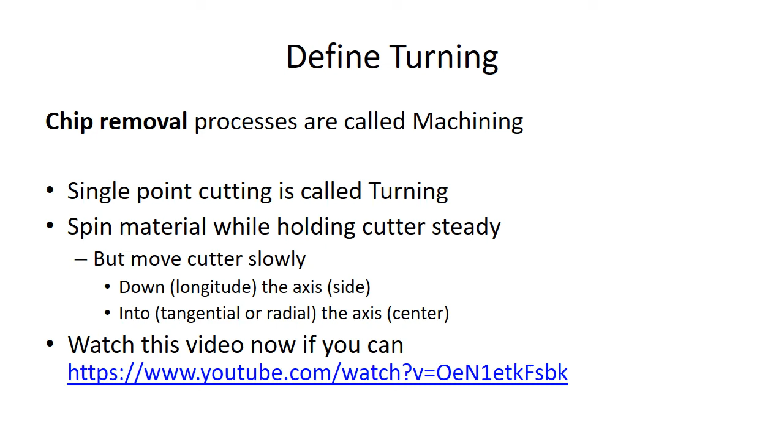We're going to learn about facing and regular turning. Now, the machine that does all this is called a lathe, and there's engine, turret, and wood lathes. The most common lathe, particularly for manual machining, is the engine lathe. The turret lathe will usually be more of a CNC machine, which we'll get into in a whole nother unit.

And I will talk just briefly about wood lathes.

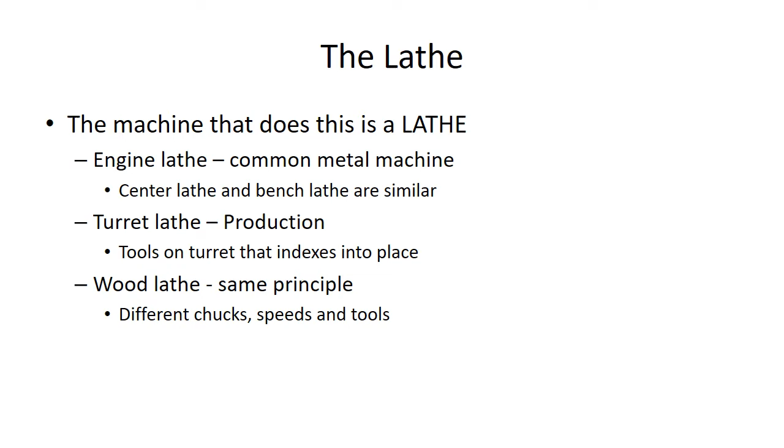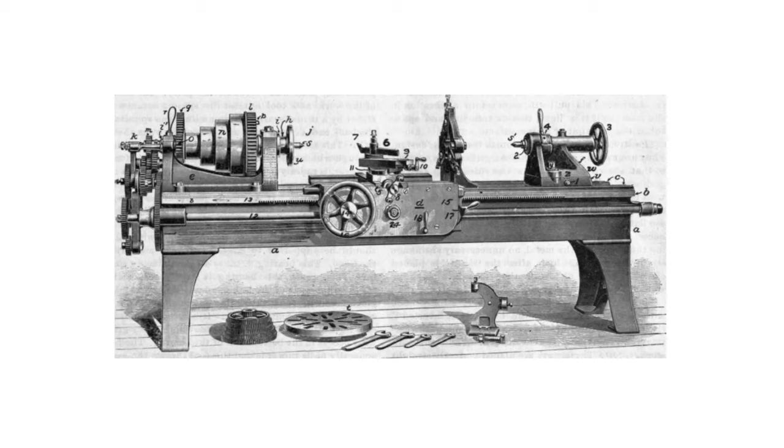Now, this is an old one, and you think, oh, it's got to be different than today's modern ones, but you know what? Over on the right you have the tailstock, on the left you have the headstock, you have the thing in the middle called the apron, and that little thing standing up in the middle is a tool rest. Put a long piece of material through there and it can hold it steady if it's particularly long.

Now, all lathes have their controls on the left in terms of speeds, feeds, how you can flip things around. Then there's some levers on the apron, and then there are wheels. The wheels carry the tool in, out, left and right, and in and out.

One of the machine shop videos has a very good explanation of what the z-axis is and what the x-axis is.

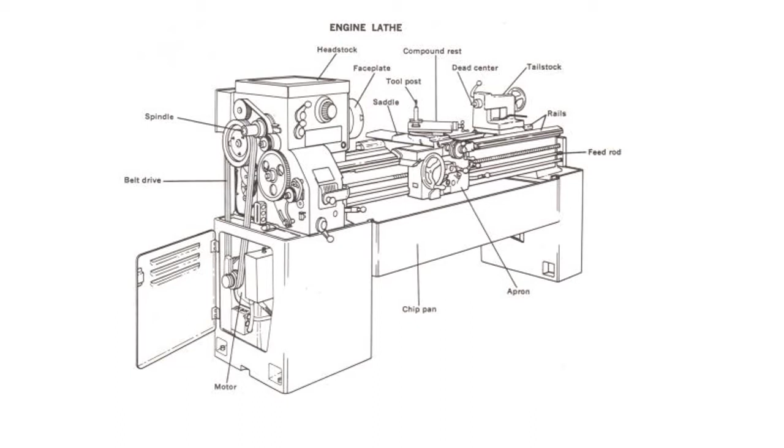And here's the names of all the stuff that goes onto it. You can pause here and memorize all these names if you want to. Notice that the tool post is sitting on what's called a compound rest. You'll see that on the videos.

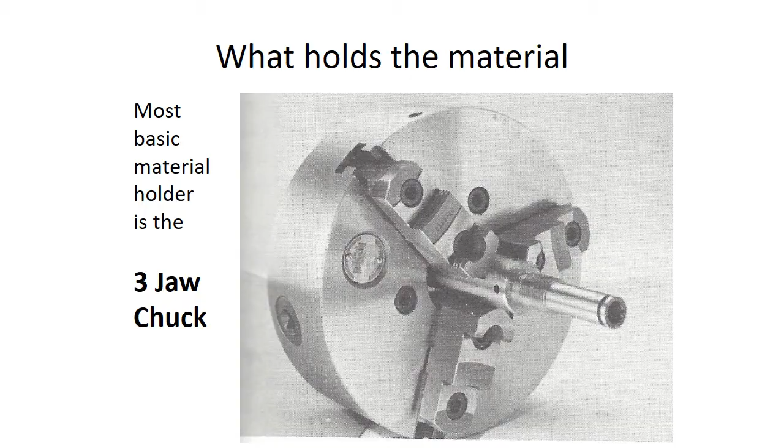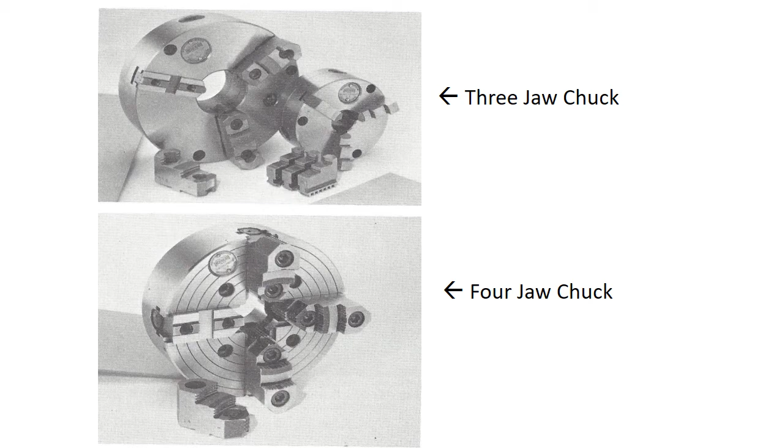Now, the part that does the cutting, sometimes it's just called a tool, as I said, tool holder, or whatever your tool is. There's a couple of different kinds. High-speed steel is still around.

It's being replaced in a way by ceramic inserts. I'll show you examples of those in a second. In the Machine Shop Secrets video, it shows a lot about different angles of cut and being able to shape things around.

He's actually taking a bar of high-speed steel, and he talks about going over to the grinder. He is actually grinding a particular angle on the front end of that piece of high-speed steel that gets put into a tool holder. Those angles and the different shapes of these cutting points can be done for different operations.

The inserts basically have one shape, but for the most part, that's the shape that you want to work. I'll show you the different types.

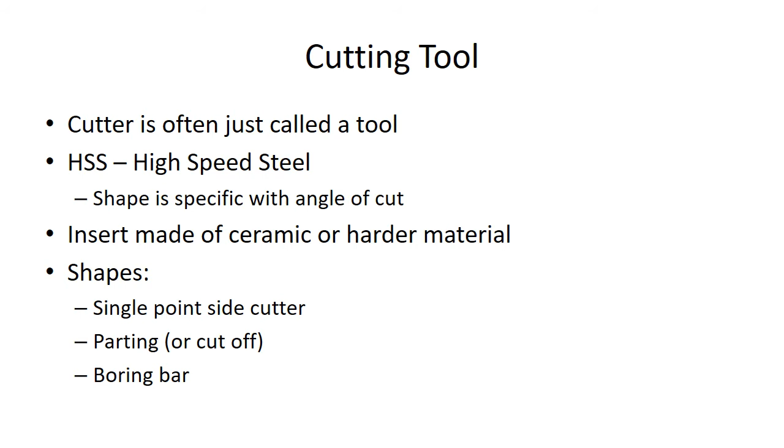You've got side tools. It could be left pointing, right pointing. These are ones that would have inserts in them.

You have a cutoff tool, which is also called a parting tool. And when you saw my homemade video where I was making the file handle, I used the parting tool, the cutoff tool, to cut the piece off at the end, and you'll see that in the videos where it's used.

The boring bar looks like just a regular side tool turned sideways, and in a way it is. It is for going into the inside of holes. You drill a big hole, and then you can put the boring bar in the tool post and use it to go in and cut on the inside of - cut an inside diameter.

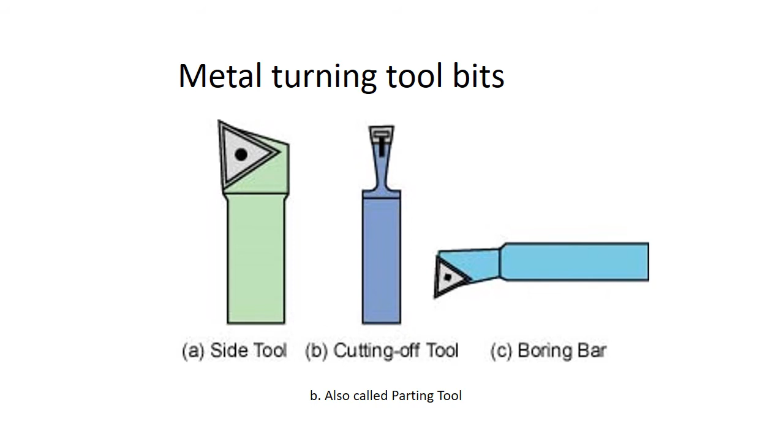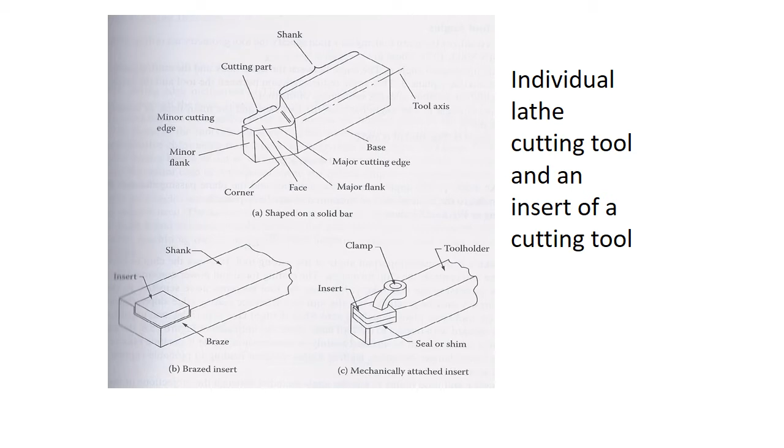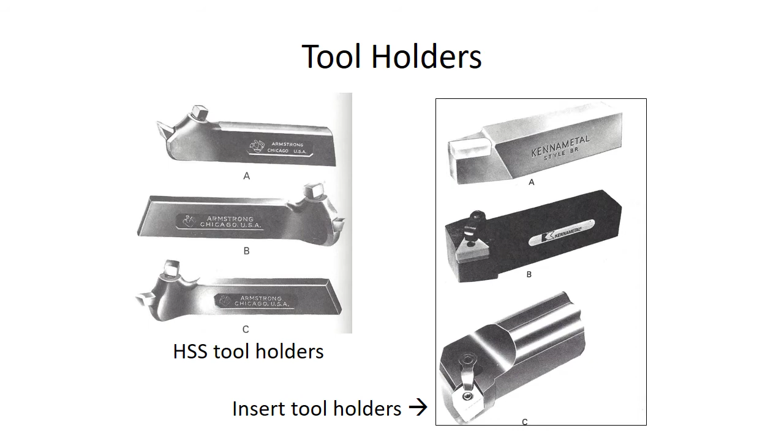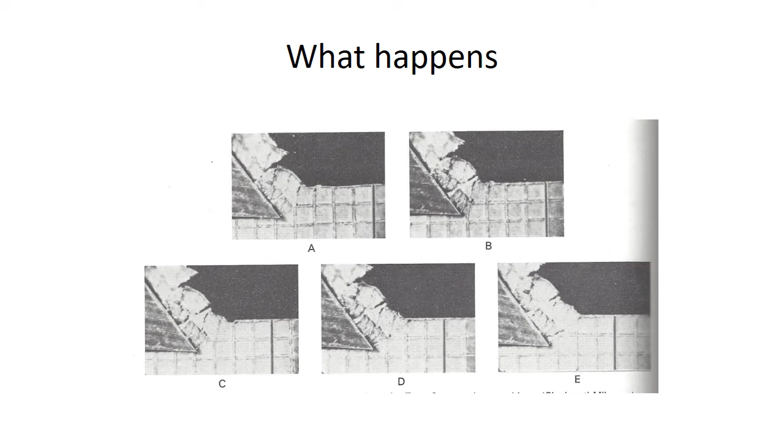Now, what's happening when we're doing this? The cutting tool—you really can't see much difference between A, B, C, D, and E—but the cutting tool is the solid piece going into the softer piece that has a grid on it, and as it forces itself in, it's harder and cutting away part of the metal, which is the part with the grid on it. That's basically what's happening: a harder piece of metal is displacing some other pieces of material.

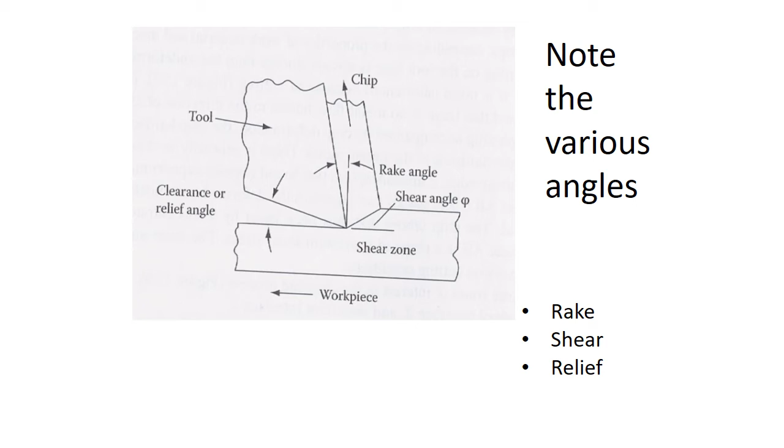Here's one other way to look at it. The tool—you want to think about the shear zone—and there's a lot of stuff dealing with angles. I want you just to be aware of the fact that you've got the angle at which the tool is coming in, the angle at which it is cutting, and how it's being done, all impact the quality of the cut. And that shear zone is where it gets really hot.

Sometimes you just aren't going to get a continuous chip because the material may be particularly hard, or particularly prone to breaking up because of the grain pattern on the inside. But most aluminums will give you a continuous chip if you're cutting at the right speeds and depths, which I'll be talking about in just a second. You want to try to go for a continuous chip. Discontinuous chips may happen because you're going too slow, or for a variety of other reasons.

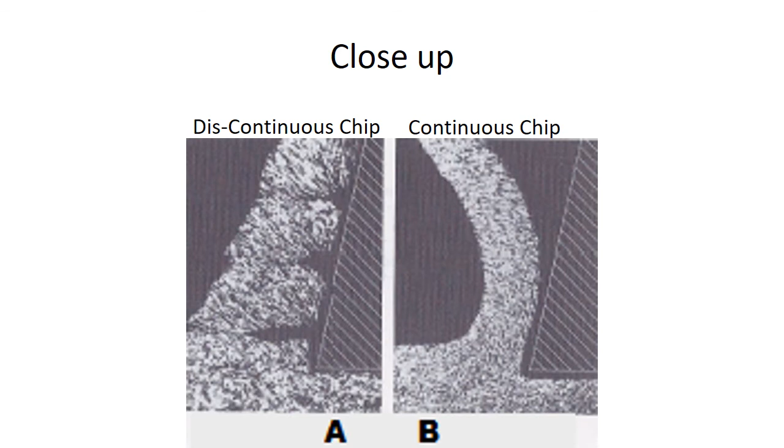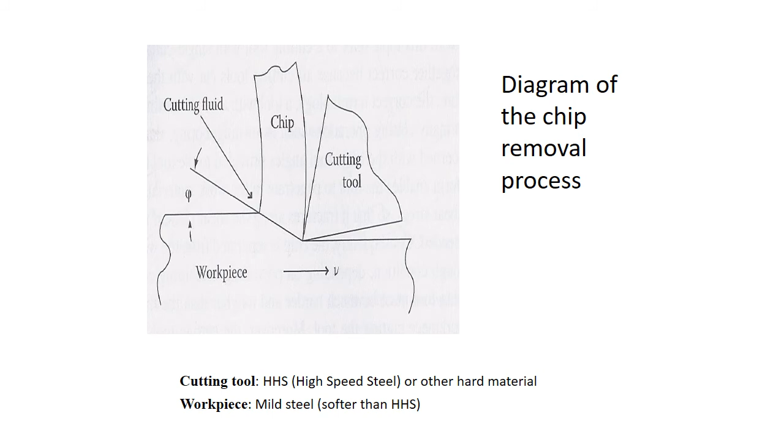But you would put the cutting fluid in that space where the backside of the chip is being made, because that's the part that's hottest, since that is where the metal is being ripped apart.

There's basically two types of cuts that you're doing: the outside surface, which is also called straight turning, and it's identified on that video from slide one. Unless they've changed it, they actually bring up some of these words. If you're working on the end of a piece, it's called facing.

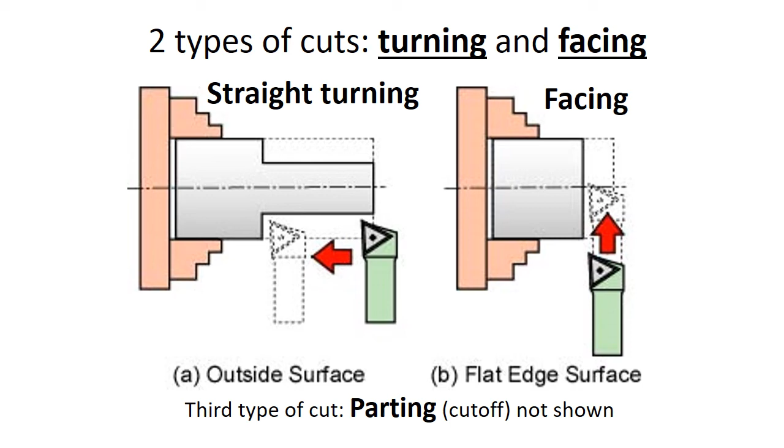So those are the two different types: the outside part, or turning, or facing if it's perpendicular to the part. There's also parting, which I'll talk about in a minute.

And you can have several variations—left hand going, right hand in the middle, round. You don't have to memorize all these.

But you can also do what's called threading on a lathe. Now, it's not particularly common—it's very advanced, and it's not done much anymore. External threads like this are going to be cut with a die, which I think was explained in one of the videos on threading, tapping.

One of my former students went on to become a production manager at a local manufacturing company, in charge of the machine shop there. He said if he caught one of his machinists manually cutting threads, either it was going to be on their own time or they would be fired, because the only time you do those on regular manually operated lathes is because you want to learn a little bit, or because you are having to make a part for some sort of repair. It's very slow and very painstaking to do, and you just don't see it much out there in the world.

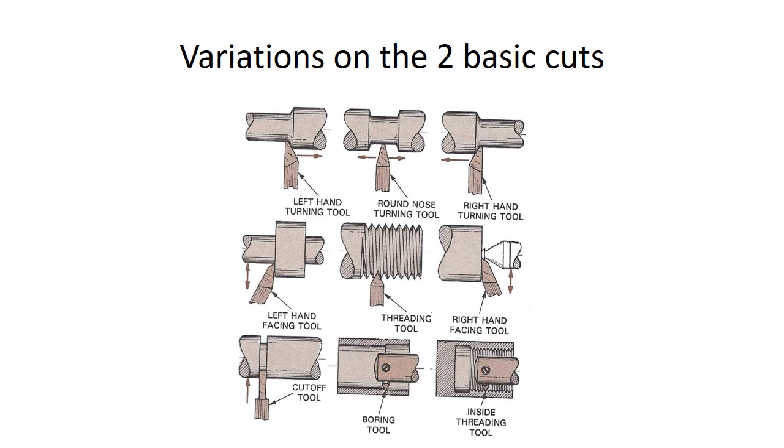Here is the idea of what it's going to do. Keep in mind that the big gray parts are spinning around, and the cutting parts are staying rigid.

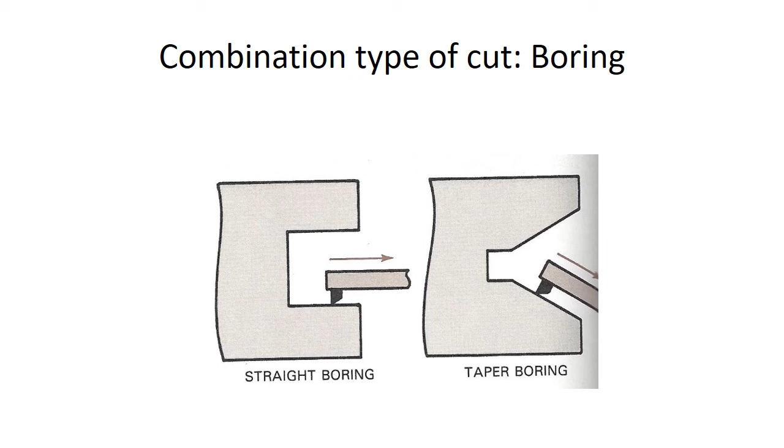You can do a lot of different kinds of cuts: side tools, facing, boring holes through, drilling holes through. It's harder to do some of the other stuff with thin plates or thin slots. You may need special tools, but you can do some others. There are things you just cannot do on a lathe, so if you design those in, you better have a 3D printer. But 3D printers and production don't really go together because 3D printing can be slow.

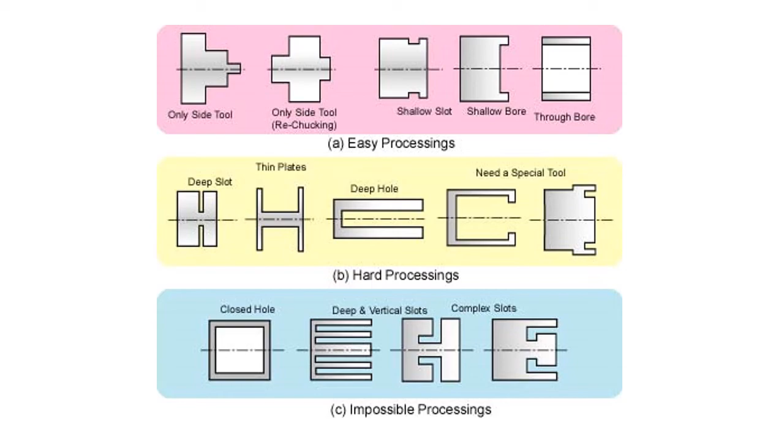Here I'm going to introduce the idea of speeds and feeds. I'll talk about it again when I discuss milling and go through how to calculate it, but not here. The three key variables of the cut are: the speed the material is being rotated, the depth of cut, and the feed rate, or sending speed, how fast it's being sent down the end. Of course the material is a variable too, but that's accounted for differently. So those are the three variables.

100 thousandths is a pretty good depth of cut, though you might want to do 50 thousandths just to start out. But you can go 100 thousandths, and whatever your roughing depth of cut is, you'll want your finishing depth of cut to be approximately half that. You have to calculate that. How fast you go down the side, that sending speed or feed rate, matters, and the rotational speed is something you calculate. We're going to learn how to calculate that in the milling presentation, which will be the next one after this.

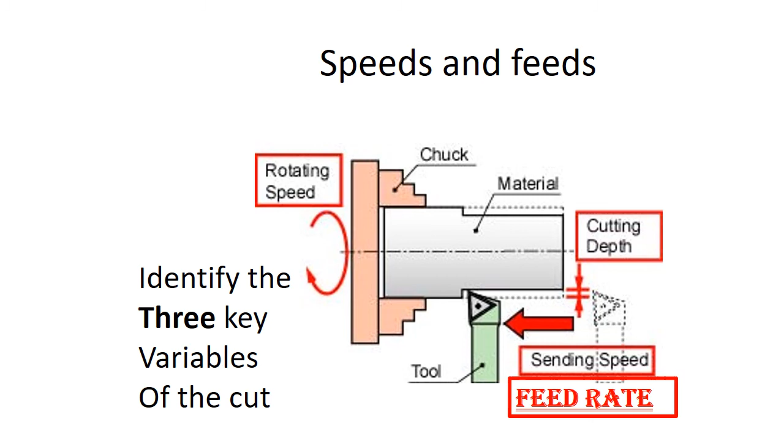Now, what can happen if you turn the wheel that moves the cutting tool too fast? You're going to get grooves, because this is single point cutting, and it'll look a little bit like you're putting screw threads on it. So you want to go slow, slow it down, and then you will get a nice smooth cut.

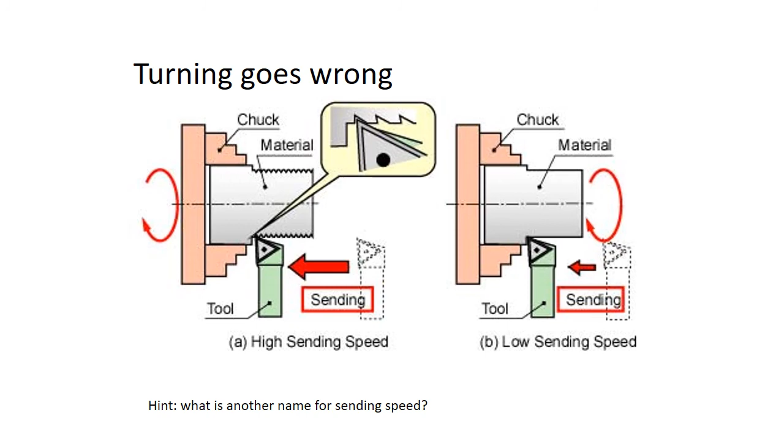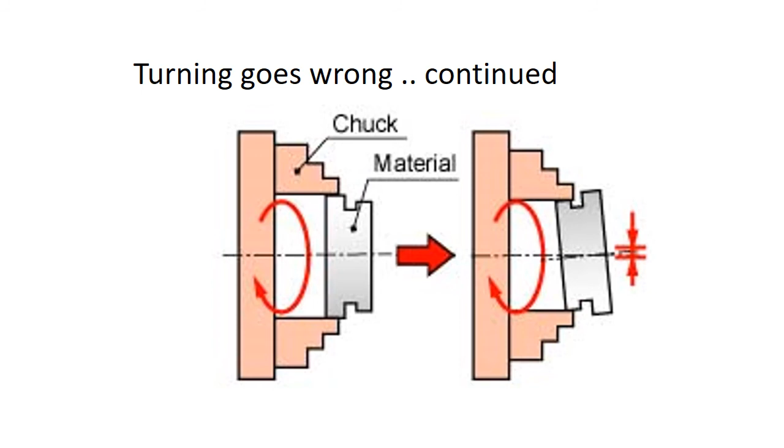If you put the material in the chuck improperly, you will not get a good product at the end. It's easier to do than you think. You'll notice here that they had a piece, and they're flipping it around and got it out of whack, which messed it up. It's hard to conceive of this, but if your part is way out away from the chuck, and maybe it's thin or whatever, you can actually end up pushing it out of the way rather than cutting it, or cutting a little bit while also pushing it out of the way. You can end up with a part where, after you've machined it, the end is bigger than the part that was close to the chuck.

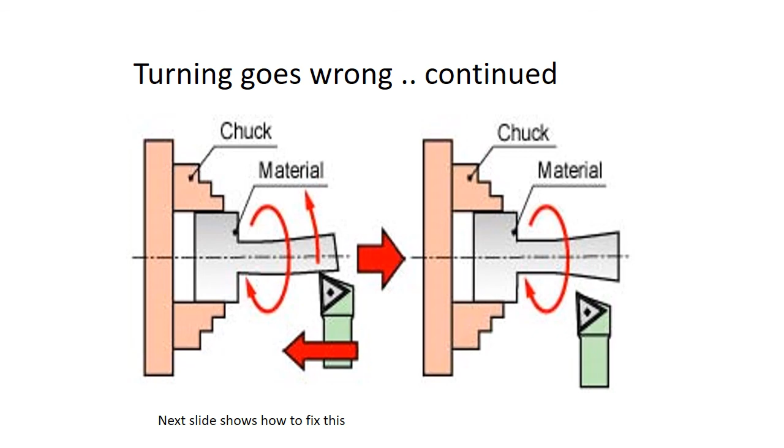To fix that, what you would do is put your piece in a tailstock, drill a hole, and mount the material so it won't rattle. You'll see that I did that in my homemade videos about turning. It's a very normal process.

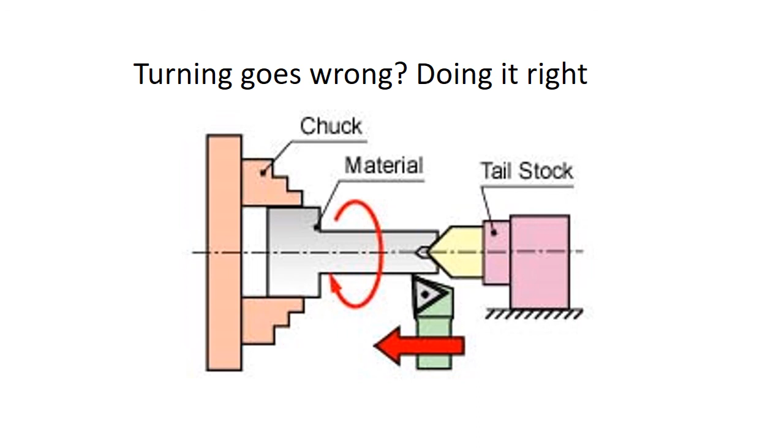There's a video on coolant, and I just talk about coolant in this class and the necessity for it. The harder your cutting tools are, like ceramics or carbides, the higher temperatures they can handle, not necessarily higher speeds, but temperatures that get hotter than you can get with high-speed steels. So they may be able to make some cuts without coolant, but the high-speed steels would need some coolant.

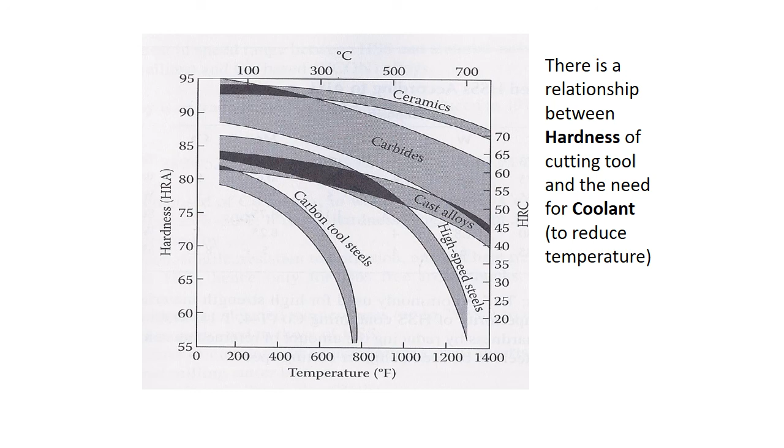Okay, very briefly, wood turning. It's more of a hobby, a craft thing, but it does do the same sort of thing. You handhold the tools, and they have funky names like gouge, parting tool, and skews. You move longitudinally by hand. You can also do facing, but you have to mount the wood in a faceplate. There are two videos on this, one showing regular turning and one showing faceplate turning.